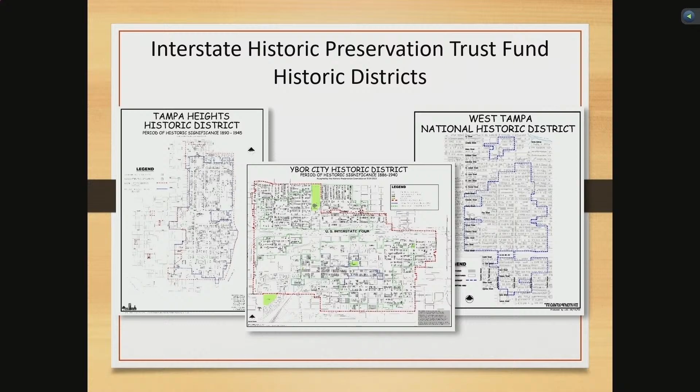They were rehabilitated and sold back into the community, and those excess funds from the sales help fund this program. Its mission is to accelerate the exterior historic preservation of properties in the National Register districts that abut I-4, which is Ybor City, Tampa Heights, and West Tampa. The program has awarded over $700,000 in grants for rehabilitation to houses within those National Register districts. Again, those 3 districts are Tampa Heights, Ybor City, and West Tampa. And those are the national historic districts, which include some of the boundaries of our local districts as well.

To be eligible, a property also has to be at least 75 years old. The proposals must receive a CA and adhere to the Secretary of Interior standards for rehabilitation. The funds cannot be used to acquire properties, and the work cannot have already been initiated or completed.

For the grant program, applicants can apply for a grant between $5,000 and $25,000. The property must be homesteaded and must be their legal residence. They must also not exceed 140% of the median household limits. Eligible activities include structural stabilization, exterior restoration, rehabilitation, or reconstruction of architectural details.

We aim for this to be used as a facade program. We give more weight to those focusing on the front facade of their projects, but we do include things like re-roofs that help keep the structure maintained.

As I mentioned, we have 5 currently being evaluated for the grant program. That evaluation criteria includes the appropriateness of the project as it relates to the Secretary of Interior standards, the projects that alleviate or prevent endangerment of the historic property, the thoroughness of the application, the significance of the structure, and the financial need of the applicant to maintain the improvements to the property.

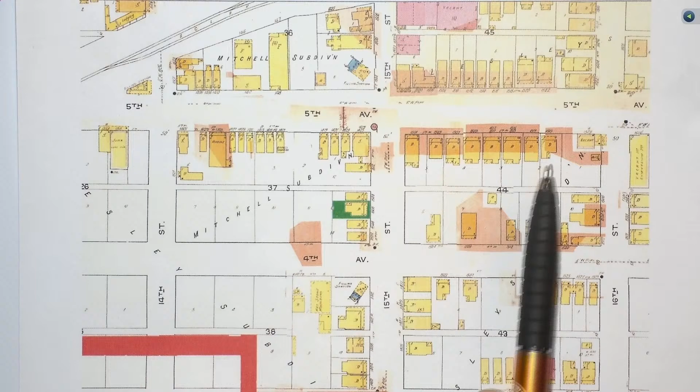You see the vernacular and the fabric within the 1929 Sanborn here. As you continue, you see some single-family row houses and some smaller houses in the immediate vicinity. Looking at the current overhead, you see how the environment has changed, with some larger footprint buildings and some attached dwelling units here and here.

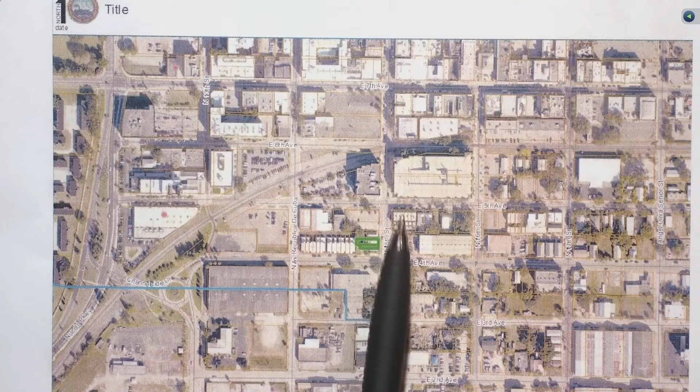Property in question here, once again on 15th Street, between 4th Avenue and 5th Avenue. This is to get you a sense of place within our local district, highlighted in green, within the red highlighted area. The green is the subject site toward the southern boundary.

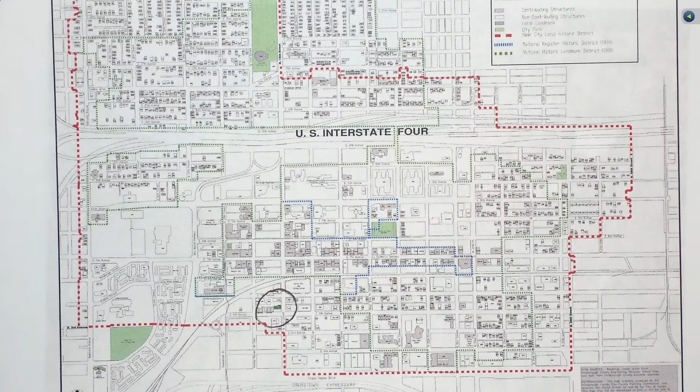This house, that the agent will go through, had fire damage in the back. They were a little bit aggressive moving forward. They started to build the addition to the primary structure without any approval from this board and without permits, so we're here to correct that and get it back on track.

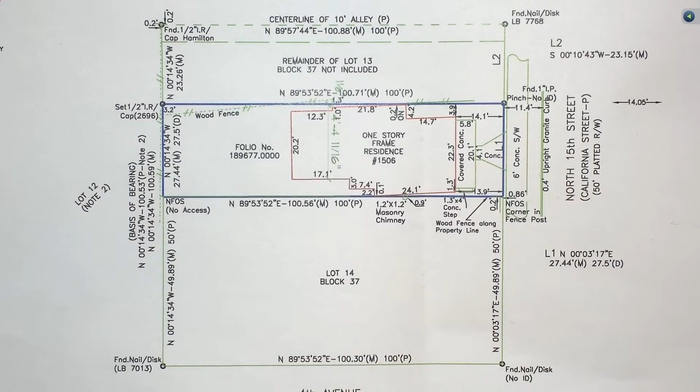And then we are making the new site plan that we already corrected, like Ron said, for the fire department, we had to move 3 feet minimum inside from the property line. So it's on this side that we moved it. We are building the deck in the back, and we'll go with the elevations if you have any questions for that.

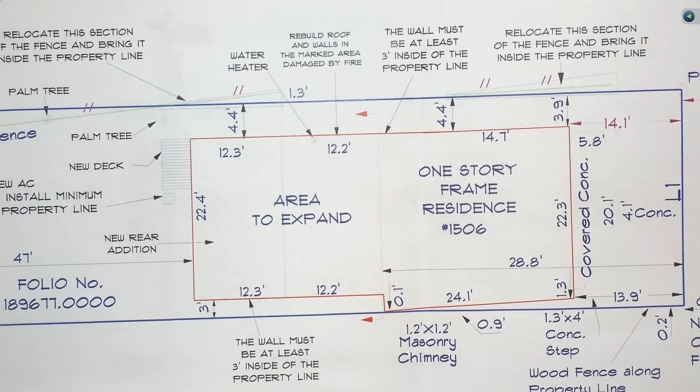No? This is your presentation. Oh, all right, so then we got the east elevation, which is not making any changes on the existing one, and the proposal, you can see that's not... look up there, look what you're looking at. So go to the east elevation again, okay please. All right, so the east elevation doesn't make any changes.

We're going to the west elevation, where you see a pop on the existing one that we remove on the new, because we have to comply with the 3 feet of the property line.

Now, on the south elevation, we can see that the existing one has a flat roof in the back. That's going to be removed because of fire damage, and then we build it as a gable. We continue with the same type of roof and the same type of material, which is metal. All the windows comply with the BLC.

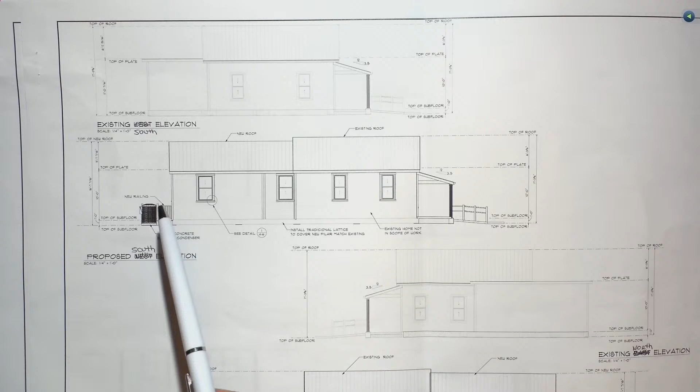And on the north side, you can see it -- the existing one has a flat roof, and then we change it and continue with the same type of roof as the rest of the property.

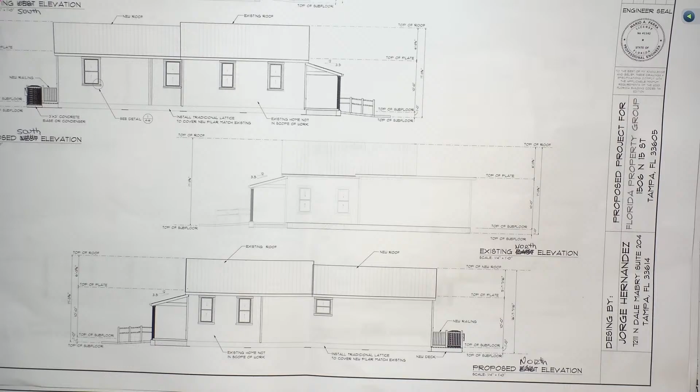This is the existing colors that we're going to continue to maintain, the same colors of the property and the same color for the trim. The trim is going to be the same, and all the material we're using for the siding is going to be the same siding. So we don't change anything on the facade.

Now regarding the parking, this is the site plan for the parking -- we agreed to have 2 parking spaces that are already submitted.

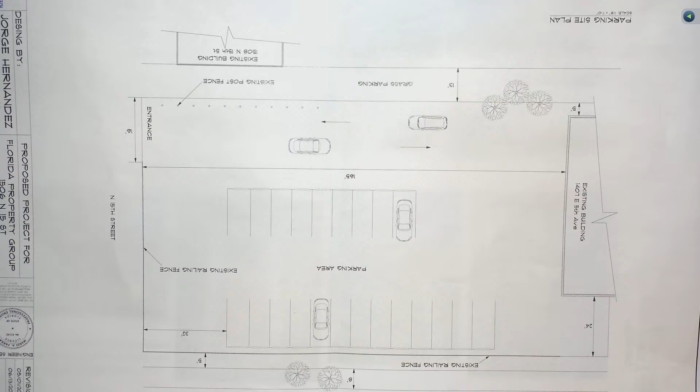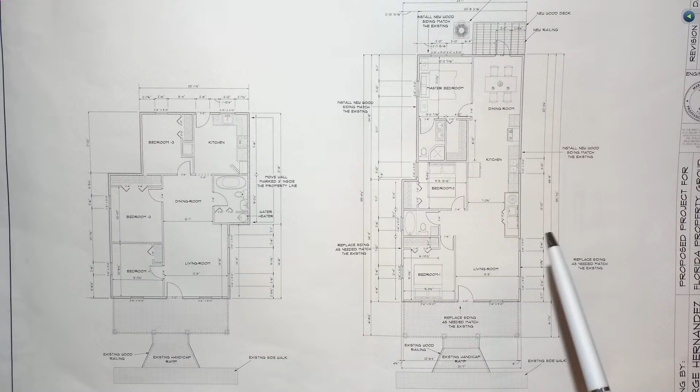Okay, this is the existing floor plan, and that's the new floor plan. This section in here was affected by the fire. That's why the wall had to be removed and completely replaced. So that's why we have to comply with the 3 feet from the property line. That's it, thank you.

Good morning, Commissioners. Ron Vila, I'm a planner with Historic Preservation. Staff finds that the application is consistent with the Ybor City Design Guidelines. In your packet you also have a letter submitted to our office with some information, and the owner who crafted that letter is here if you have any questions.

Moving down to the conditions reflected on pages 3 and 4, I know the agent has a wall section that should be shared with you today, from the top, the ridge, all the way through the foundation. There were some details on the house. The house is a very simple house, so the addition should complement the vernacular of the house. It had a gable vent on it that is reflected in the staff report.

I think additional information is needed on that. The initial request we saw, the introduction of windows were needed on the north elevation to provide additional windows. On the back we were working through different scenarios - at one time they had some sliding doors and a French door. This morning he just showed one man door off the back and then a deck leading from the rear door to grade. So if you want to discuss that as well.

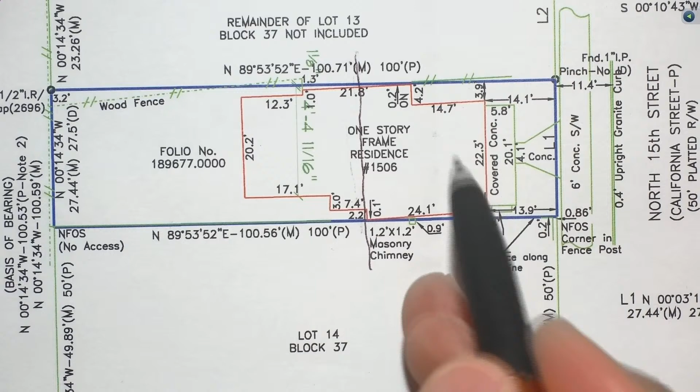Does that projection that goes to the property line, zero lot line, is that 4.2 original? That's original, yes, that goes to the zero lot line. And the line that's 24.1 feet going to the property line, is that the original facade as well? No, this is south, this is the front, the front has 3.9 right now.

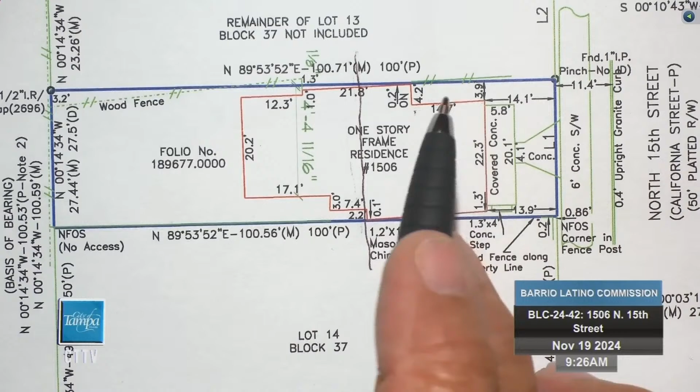But they have a pop on the side for 4.2 that we removed already. You've already removed that? No, we're gonna remove it. They're gonna remove it as soon as they start, that's why I have the new site plan.

Let me ask the question and you answer yes or no. Have you removed the 4.2 foot that goes to the property line already? Not yet. And the 24.1 feet length that goes to the property line, did you remove that portion of the property already? No. Is that historic? Is that the original 1918 portion?

It is. And the 4.2 foot piece, is that part of the original 1918 structure? That's correct. And that line you drew is the original rear of the historic structure, correct? That's correct. Okay, I have a question for staff.

I understand fire codes, I understand building codes, but when it comes to existing buildings, especially in preservation, there are exceptions. Was that reviewed with the applicant and building officials within the city? Staff's understanding is this is part of the historic home, with some additions in the back. This setback line here is going to continue as his plans show, we're not moving it closer to the north property.

No, that's not where I'm going. I'm asking about the 4.2 - if that is an original piece of the primary 1918 structure, and that 24.1 foot at the south which goes to the zero lot line, if that's an original portion of the structure as well. This was part of the original structure that through the fire was removed - this is no longer there. They cannot get credit for any of it. That's an important piece of the puzzle here.

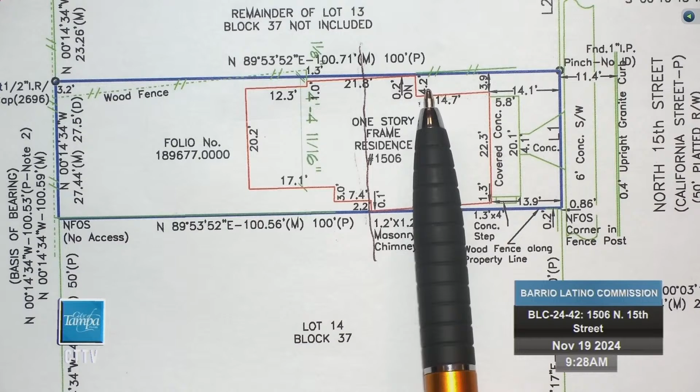So the 4.2 extension that goes to the property line at the north here - that little rectangle at the northwest corner of the original square - that is not original. That was built after the fire? Absolutely, and this, as shown in my pictures, has been built after the fire.

Okay, then let's go to the south elevation. How much of that is original? This is all original. As the property owner to the south came forward, this is an existing condition - we want to leave that, it's vested in. But anything new has to meet fire code.

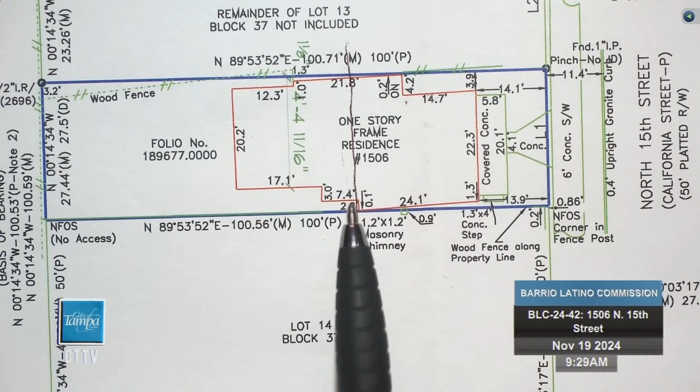Then let me see the proposed plan, please. Even the 2.2, even the 2.2 was existing onto the 2.2. Understood. I want to see your proposed plan, please.

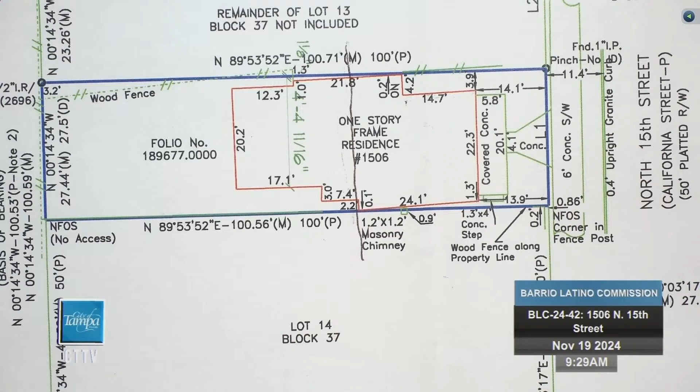So I get the north elevation, I understand. This is the proposed plan.

Does this have the property line on it? I thought there was a plan that had the property line - the site plan? Oh, so you do keep it, all right, I was afraid it was gone. But thank you, that was really important because there was a staff comment about a demolition plan.

And do you have a demolition plan with you today? Yes.

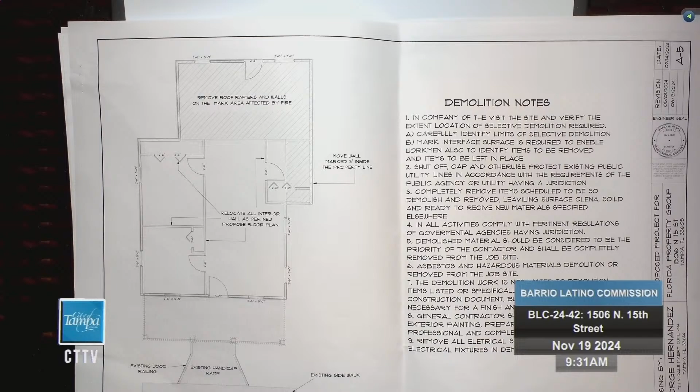Okay, I have no other questions at this time. I might come back to it. Yeah, no questions at this time. Thank you.

So, on the south property line, go back to the new site plan. So that 0.1 foot is right on the property line on the south side.

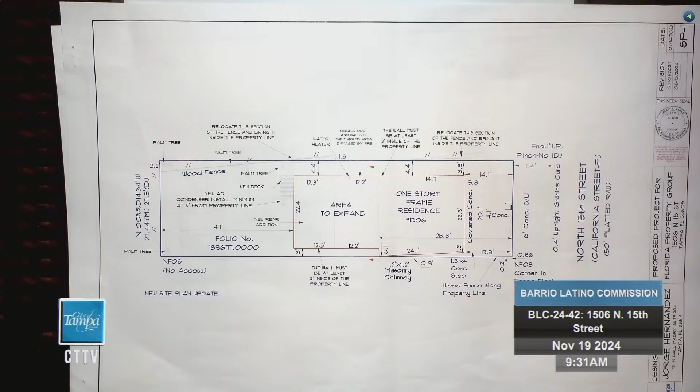And that masonry chimney is over the property line? No, the chimney is not on the property. It's on the property line. So the chimney is wholly on your property? It's on the property line, yes. Are you seeking to maintain the chimney?

Yes. I didn't see that chimney on any of your elevations. We don't have that drawn on the elevations. It should be in the south elevation, but we don't have it drawn in. Is it masonry, a brick chimney? It's a brick chimney, yeah.

Brick chimney, so you're seeking to maintain that? Yeah, we're going to keep it like that, we're not going to touch it. We're not going to touch the chimney, okay, but it's entirely on your property line?

Yes. Okay. Are there any special considerations, since you're leaving that corner where it says the 0.1 foot, that's close to the property line? I'm not sure exactly how, if it's on it or very close. What additional considerations are you going to make on that existing-to-remain section of the historic home to protect that wall or reinforce it to meet building code?

Well, we don't need to touch those walls, they're in very good condition. There is no damage from the fire, only damage on the back area, so we're not going to touch that section. We're only going to paint, maintain, and seal the walls, and that's it.

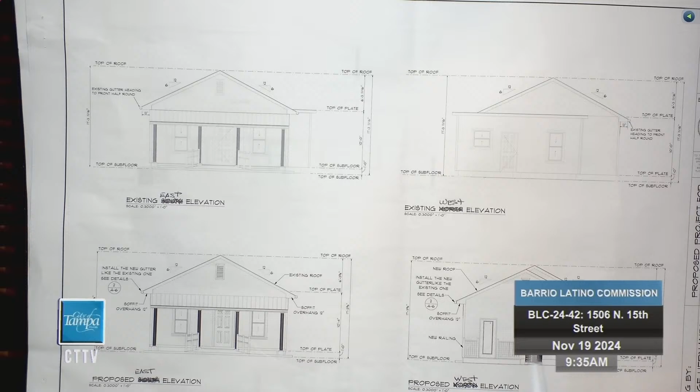Okay, on the west elevation, we change from the flat roof, we're going to continue with the gable, and we're going to use a French door, removing the sliding door because it's not approved. Also, the mechanical AC condenser is right next to the deck, a small deck at the back of the property. And then the windows are compliant with the BLC. That's all we changed. Okay, what's the material of the windows?

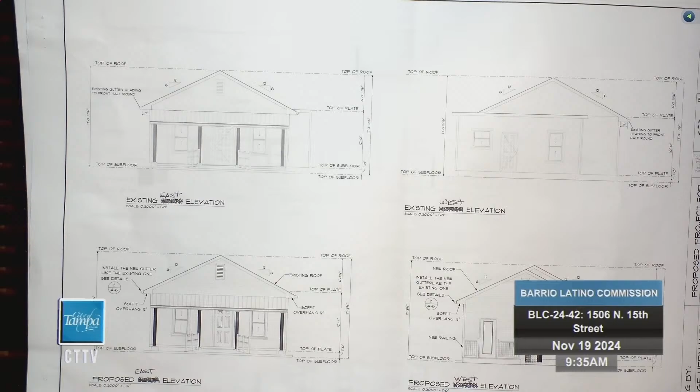Say again? You have the cut sheet? Oh yeah, the sheet for the window. This is Jeld-Wen windows. So they're wood, all wood, yes.

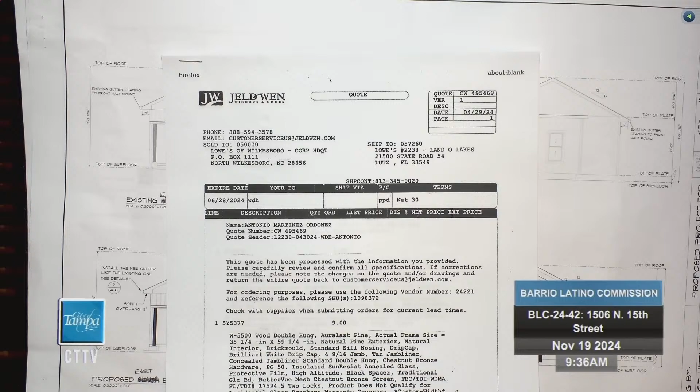There we go, okay. All right, let's talk about our roof. The roof is going to be a metal roof, continuing with the 5-rib roof profile from the old property, so we maintain the same roof. What kind of metal roof? Corrugated roof, 5V crimp to match existing. Galvalume, natural finish? That's correct.

Okay, let's go back to your elevations.

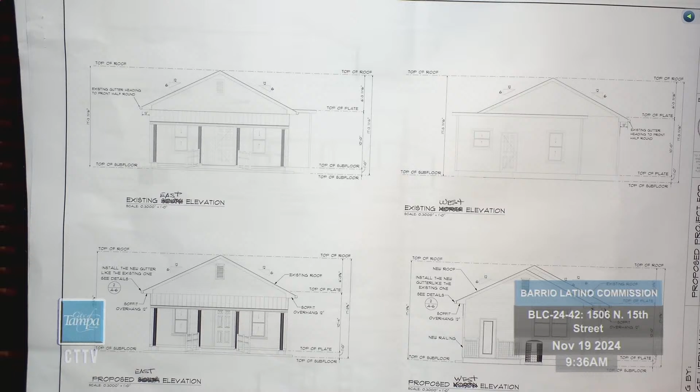All right, what is your siding there? It's a wood siding, 6 inches of wood siding, and we're gonna match it with the existing one, so it's gonna match the same profile. Yes, it's in the notes.

All right, and on your soffit overhangs, how are you gonna treat those? What's the treatment on the existing house? Is it exposed rafter tails? It's a rafter tail, 12 inches on the overhang, and we're gonna continue with the same style, exposed on the addition as well, exposed on the additional wall. And you're gonna have a gutter? We have a gutter, yes, and the gutter is already drawn on the plans.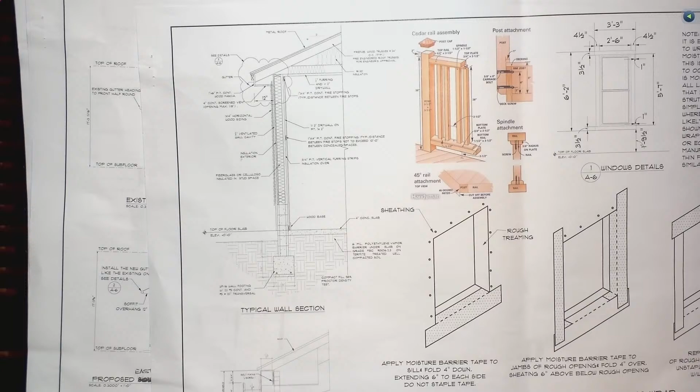Okay, so let's stay on the overhangs and the fascia. Are you using soffit panels and wood fascia boards, or are those exposed rafters? Those rafters are exposed. Well, you're showing fascia panels, and this soffit is panels, because of the front of the property. What happened with this property, the front hasn't exposed a piece of the overhang on the soffit. In the back of the property, when the property turned, they have the vent on it with the wood trim, the old system. So we're gonna continue with the same, so that way nothing comes into the roof, because there's no block. And we need to ventilate it by building code.

Okay, so you are gonna have soffit panels. That's correct, on the wood. All right.

Okay, let's talk about the railing. Is that all wood? Everything is wood, yes, and a wood deck that's raised up and off the ground?

Yes. Okay, when we're talking about our wall section here, is this how you're gonna do this? You're gonna have 4 feet of block coming up, and then you're gonna go to stud construction after that? Yeah, we're gonna go pillars, the same pillars, and we're gonna continue with the same height as the existing property. Okay, so you're gonna have exposed pillars that go down into the addition?

What's the finish on those pillars? It's block, concrete block. Are you painting them? Are you gonna put stucco on them? Well, we can paint it, or stucco, I don't know, the old ones aren't stucco, so we're gonna match the existing ones.

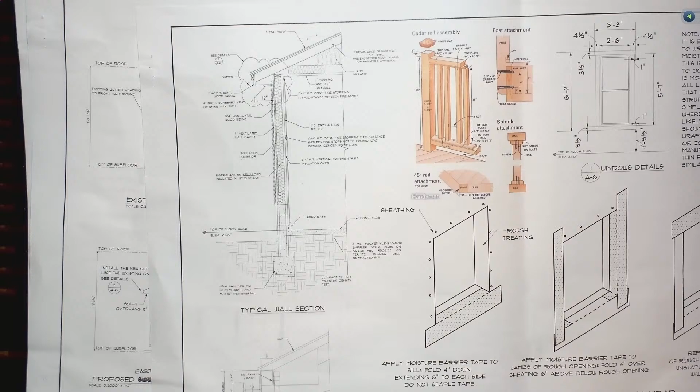Well, continue with historical, okay, and what's gonna go in between the pillars? Nothing between the pillars, it's gonna be open to the outside? It's open, well, we're gonna put a screen like we saw on the elevations. You see on the elevations that we have a screen on the back.

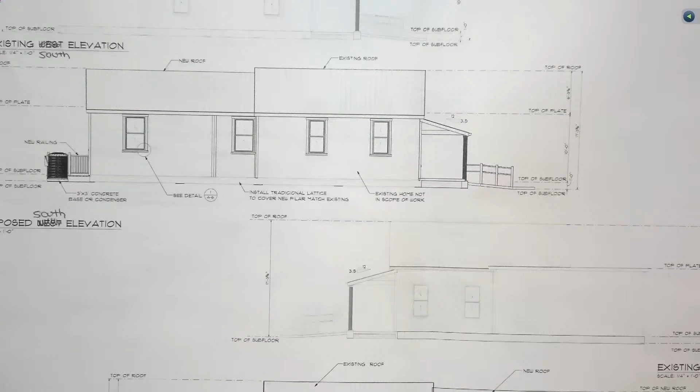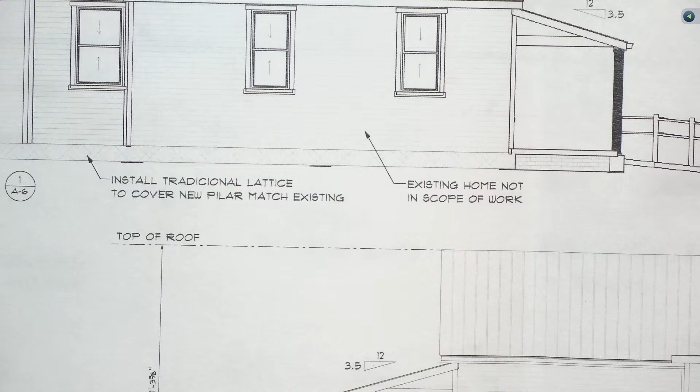Okay, yeah, could you zoom out a little bit here? Can you zoom out a little bit so we can talk about these elevations? Out, out, the other way, there you go. A little bit more, don't be shy.

Okay, all right, so if we're starting here on our corrected south elevation, your existing porch, your existing 5V crimp roof, the existing soffit panels, that corner next to that third window from the right, that's the one that's right on the property line, correct? That's correct. Then it goes back in, and you have another window. Is that window existing or new? Existing. Okay, that's gonna be extremely difficult to trim properly.

And what's the 3 lines right to the left of that window? Does that jog again, or is that straight? Well, that's what they changed on the property when they extended it. When they extended the property, there's a line and there's a trim.

Okay, are we following it? Can you draw the chimney on this elevation? Because I don't think that's right. Something's off, the chimney's definitely missing. And I think that's the historic corner, but then it goes back here, and I don't know if there's another historic jog there or not.

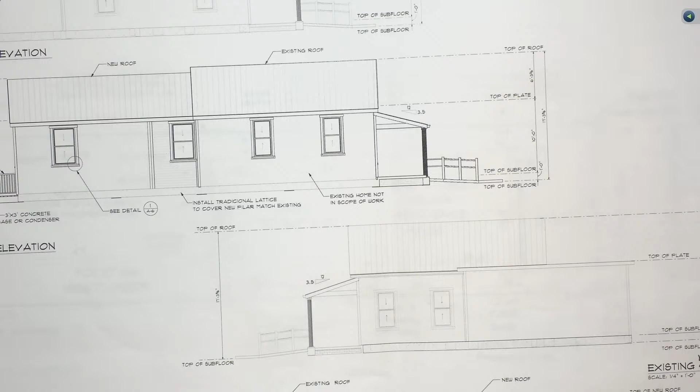Can you show us the proposed floor plan or the proposed site plan? Is there a fence on that side? Yeah. Hold the question, it's such a minimal thing.

I think he's changed the depth of where this wall is relative to providing you closer information. I see that you're asking for both sides of the structure. This is the north side, which will be removed.

That was the addition done without review or approval through the building department. But somebody asked about fencing, and then below, can you pull it up a little bit? Thank you, the bottom one.

Below you have this is the south elevation, this is where the chimney is. This is the front of the house. But the original 1918 building extends beyond that a little bit, beyond the chimney.

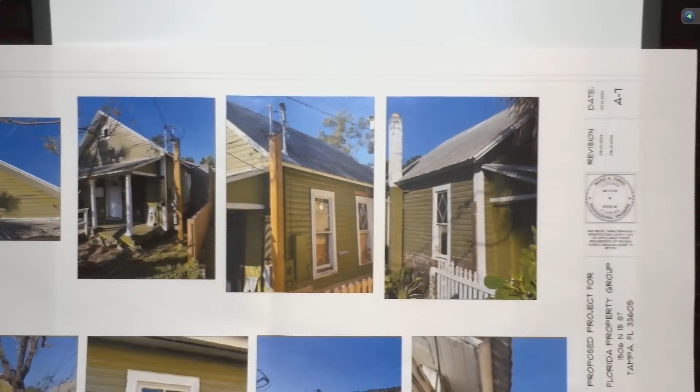How about this - is the existing right here, the chimney, right there? There's a window on the other side of the chimney. Let's go back to our proposed plan. So there is no notch.

No, but he was saying that was historic, and it's not, because look at the difference in the dimension here to there. Yeah, they don't really align. Right, where's the chimney? Can you just draw the chimney, please?

It's kind of like, I know where. Where is the - I have a couple. Sorry, that was really loud.

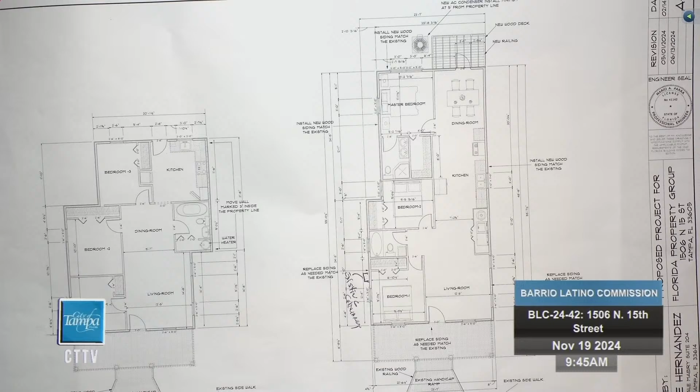So existing chimney to remain, then it goes back and goes back straight. In this corner, by bedroom number 2, is the existing historic corner that's remaining. And then the building jogs back, so on the existing plan, bedroom number 3 should have a window there, but it doesn't.

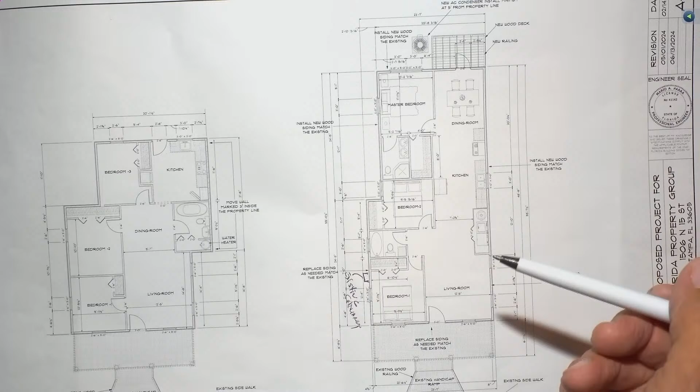Or is a new window in bedroom 2 on the proposed plan new? On the master bedroom? No. All right, let's go on the plan on the left, bedroom number 3. There's no window in there, right? That's correct. But then you go to bedroom 2, which is the same location of where that jog is?

Or is that a new wall? Is that a new wall? Bedroom number 3, this was damaged by the fire, so it had to be a new wall. Okay, that's part of the issue.

Oh, okay, so this jogs back, I don't know, let's say 6 feet or whatever, but then they're building out this wall over here, which is only 2 foot, 2 foot 10, 3 and 13/16 back from that historic existing corner.

So that bedroom 2, that is gonna be a new window. That's correct, that's gonna be a new window, yes. Okay, well now what you just told us a few moments ago about that - the existing, all the windows on the property had to be changed, all the windows.

We already ordered new windows and it's approved by the BLC. We already submitted for approval and it's approved. Are you saying that you're replacing all the existing windows? That's not what you said earlier when you were asked a question. No, we're gonna use the same type of windows, it's wood windows and it's approved.

It's approved by whom? Yeah, we sent it to be approved. That's what you're here for today, so it hasn't been approved yet previously. You get the email.

You may have a window that's been approved by this commission on previous occasions and could be standard for the district, but this project and your windows haven't been approved.

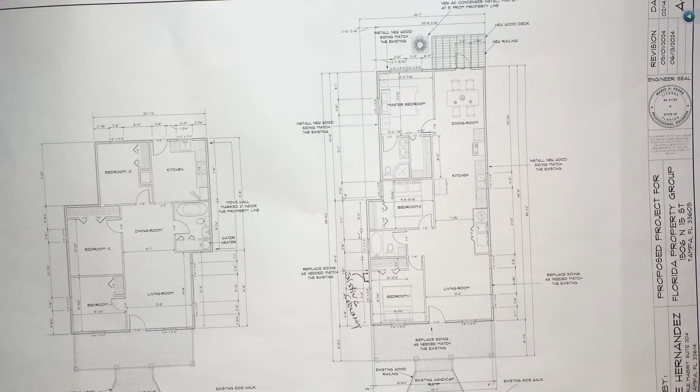Okay, and your rear door is now a hinge door. Okay, I'm gonna pass the baton, I'm exhausted, so who wants to take over?

I have a couple of questions. On the photographs, the windows show a very unique muntin pattern. And that is apparently what you're saying - that unique muntin pattern is not going to be replicated in the new windows. Is there a reason you would not refinish those historic windows and keep them in the historic part of the building?

Juan Vila, staff for Historic Preservation. I've been here long enough that we did many renovations to this structure. Those aren't the original windows to this house. About 15 years ago they introduced some windows. This area was very underkept, if you will - it was blighted at the time, and they had aluminum windows. We worked with a prior owner to bring in period-appropriate materials for the windows, but those came in at a later date, so they are not part of the earlier 1900 fabric.

Okay, all right. And the second question involves this chimney. We have no dimension on this drawing as to the size of the chimney as it extends out from the face of the house. But you're also not showing any - what does the chimney do? Is there a fireplace inside the house?

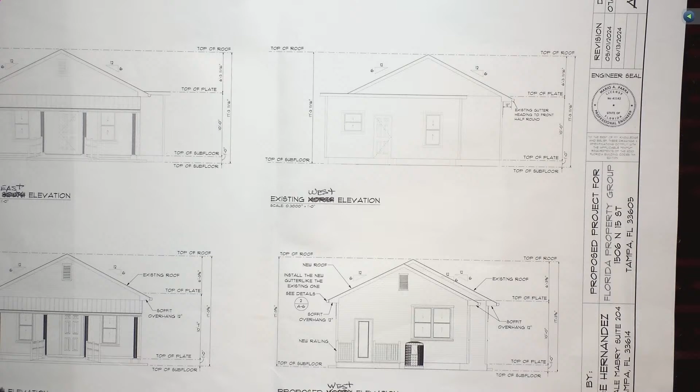Can you pull that up, please, so we can see the north? No, not zoom, just pull the sheet up. That's good, just leave it.

So what is at the rear of the addition at the deck? There's no window there. What's the reasoning for that? The north facade, the new end, closest to your new deck. That whole wall is blank. That's correct. Why? Because it's gonna be the kitchen.

And kitchens don't deserve windows? No, they don't have to have it by building code. I know that, but can we see your floor plan really quickly for that area, for the first floor, the proposed?

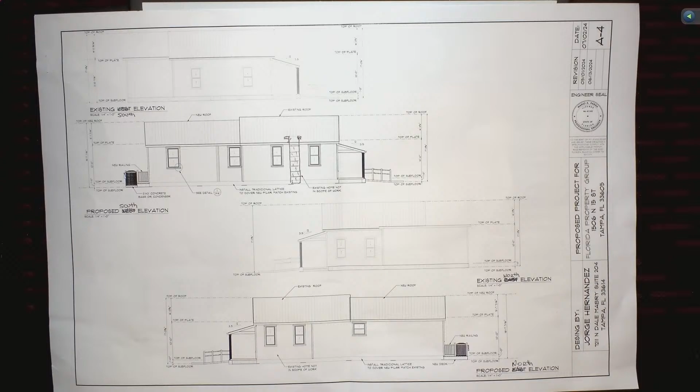And you can just put that on top of the elevation, lay it on top. Can you rotate it 90 degrees, the plan? That's not the kitchen, that's the dining area. This dining area, this is the kitchen right here. So would the kitchen even have one window over the sink?

Okay, that's beautiful, but I am wondering if you looked at the opportunity to add a window or two. Oh yeah, that is not a problem. Okay, we can add it. Okay.

And then there was a remark here about using French doors instead of sliders. Are you using sliders at the rear? No, you're using a French door now. Okay, yeah, okay.

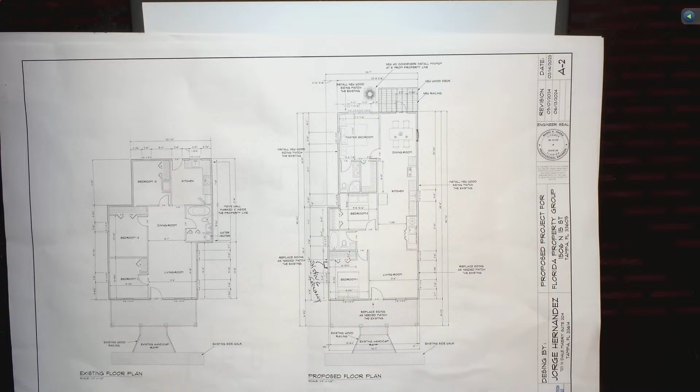And it looked like that door was glass? It's glass, a single glass, yeah. At the rear, on the deck? On the rear. And the front one is an elevation of that? If that was just in the elevation, do you have a spec sheet for that? For the rear door, not yet. Not yet, okay.

And then the AC, we see it's at the rear. The parking solution, you mentioned that you have an agreement. Have you brought that agreement with you so that it can be entered into the record for staff and legal?

Could we just ask him to be sure to provide that? Yes, we will. Sir, we'll just make sure that be provided to staff today or in a reasonable amount of time. In the interim, can you point out on a site map where the actual lot is? Because you showed a plan, but I have no idea how close that is to the house.

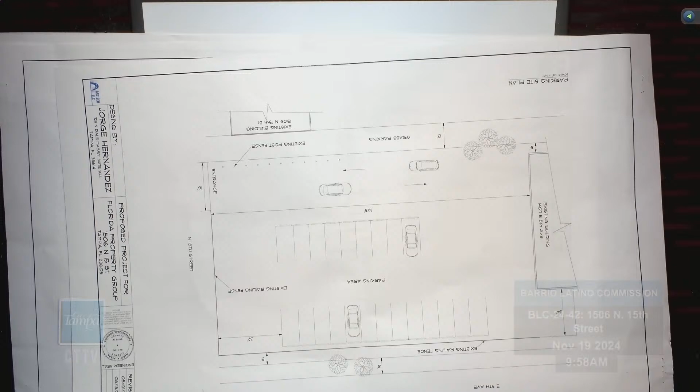It's supposed to be within 1,000 feet, correct, by code? For the lot where you're gonna have the parking lot, yes, I showed on the site plan for the parking lot. It's 2 lots to the north. He needs to be able to answer the question, and I asked, where is it in relationship to the existing structure? Where's the existing structure? I have no idea how close this is.

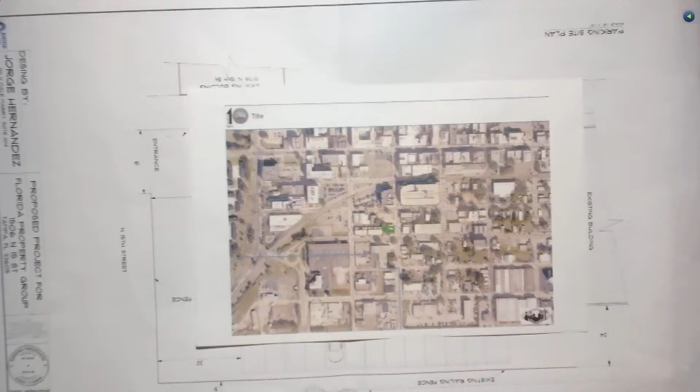Juan Vila, Historic Preservation, if I could assist, sir. This is the vicinity map that I put into the record initially. Property in question that we're talking about is in the green. The lot is right here. Perfect, thank you. Yes, ma'am, 150 feet.

Parking lot, man. He has to come back. I think we'll have to-

I have no other questions at this time. I have a couple more.

Could you go back to the side elevations, the north and the south? We have a staff comment on here to incorporate vertical trim board at the break between historic and new.

Okay, can you zoom out a little bit, please? The whole sheet. Right, right, the whole sheet. We're gonna look at all the elevations right now, please. Okay. There we go, okay, good, perfect, thank you.

All right, so on the south elevations, again, those 3 lines to the left of the third window from the right, that shouldn't be there. Because there's the new addition where that third window from the right starts is a new window and a new wall. So there's no break that needs to occur there. Okay, so we're gonna get rid of that.

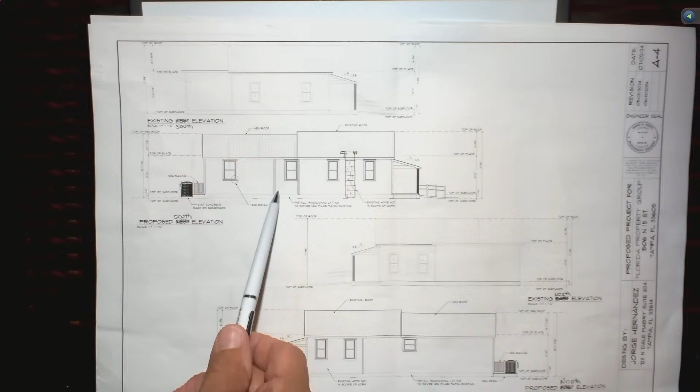Here. What does that indicate? That's indicating that there is the new section from here onto the back, the new construction. Yeah, I don't think that's accurate. Okay, so that whole wall from that third window is brand new. Correct, so you don't need that trim separation. No, I don't need it. Okay, let's cross that out. Yeah.

Okay, now let's go down to the bottom elevation on the north. You have your existing roof, then you're showing two lines to the right of the two windows. We're gonna need that closer down the line, right in there, so that delineates between existing and new accurately for both elevations. Do you agree with that? Okay, all right, that takes care of that staff comment.

Okay, talked about parking detail. I don't have any more questions at this point in time. Anybody else? Susan, you good? I'm good, thank you.

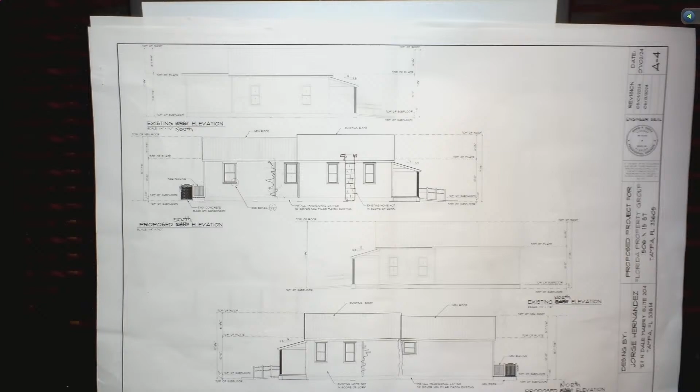We're gonna go ahead and, we're done asking questions. You have a few moments if you'd like to summarize any of the items that we discussed or rebut anything that we discussed, and then we're gonna go ahead and close the public hearing and discuss the case. Okay, thank you. I don't have no question. Okay, so, all right, we're gonna go ahead and close the public hearing since there is no rebuttal, and then we can have discussion on the case, starting with Mr. Chase.

Yeah, I have no comments at this time. I have no comments at this time. I don't either.

I only can remark that the inaccuracies of the drawings have made it extremely difficult for the commission to actually understand the direction and the purpose of what you're doing. And I would caution you in the future that you really take heed to the comments that have been made up here, so that when you have an occasion to present another set of plans to this commission, that they represent more accurately what you are intending.

Okay, maybe that can be a condition, to bring a fresh set of plans that accurately describe everything. Well, seriously, these plans can't be submitted with scribbles on them to the building department, so they will have to be revised, and I think maybe we should ask for them to be reviewed by staff.

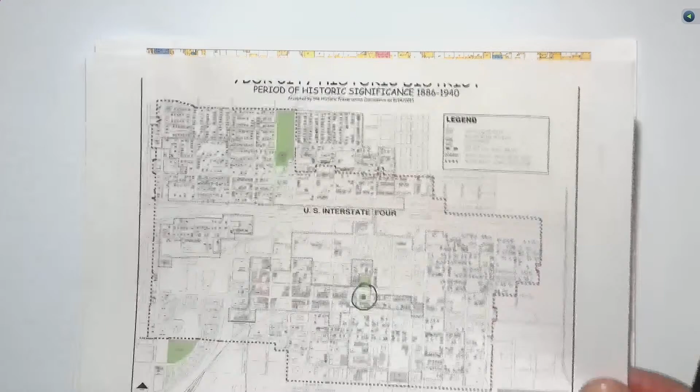We're going to be looking at this property here. This is our vicinity map to show the concentration along 7th Avenue and the contributing structures there. This is on the north side of 7th Avenue, between 18th Street and 19th Street.

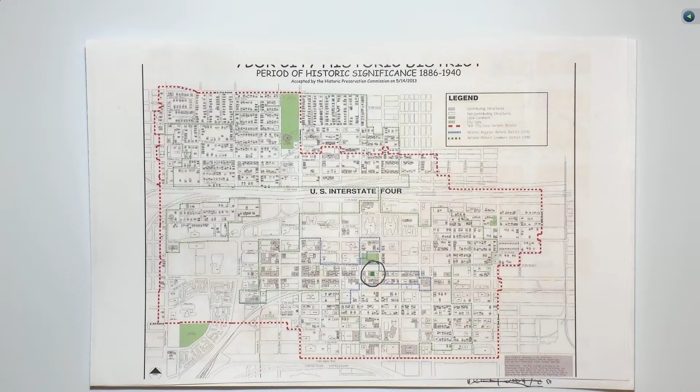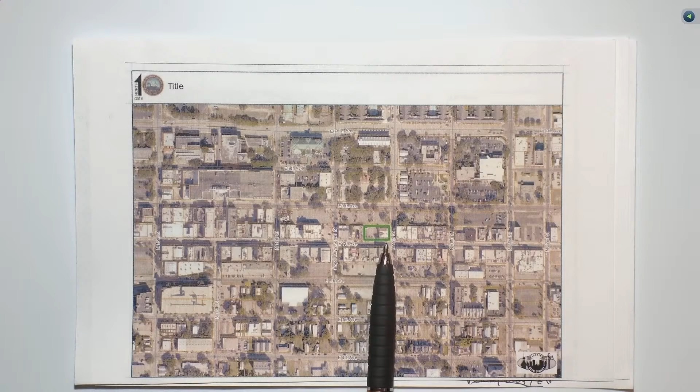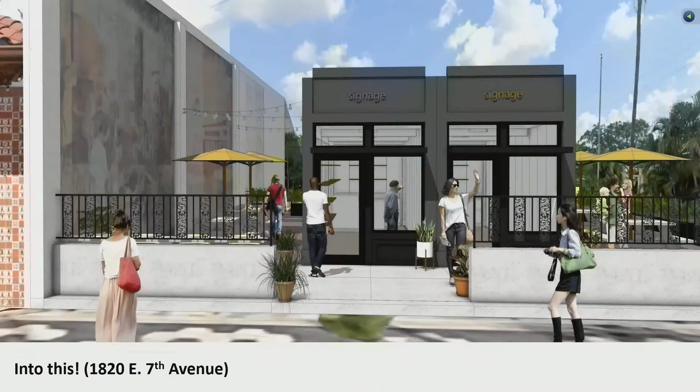So what we're asking today is for approval to turn a part of this sea of asphalt on 7th Avenue into this. We all know that Ybor really needs more retail—I think we'll all kind of agree with that. So that's where I'll leave it. Let David take it over.

We talked about this at the last hearing, but this is something that Stephanie and I are very passionate about—that, as Mr. Vila pointed out, on the Sanborn maps there used to be this concentration of retail along 7th Avenue. From things that happened before we were all around or in charge, basically those teeth were knocked out. So we're trying to come up with techniques to fill things up at an interim level. Obviously what we're trying to do is reconnect the pedestrian flow.

Stephanie and I live in Ybor City. We eat at these restaurants, we go to these bars, and whenever you encounter one of these pockets that's hundreds of feet long of asphalt, it diminishes not only the pedestrian experience, but also Ybor City's vibrancy.

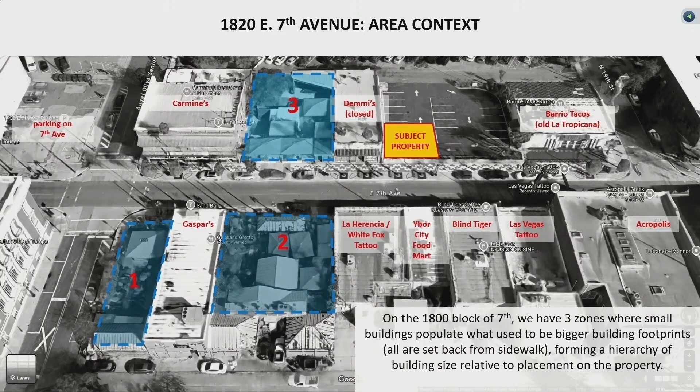Just to go through the area context, the subject property is clearly depicted, and around it we have 3 different zones which are vacant, empty lots that had small structures added to them subsequently. You've got the corner of 18th and 7th next to Gaspar's—actually, both sides of Gaspar's have small structures. And as Mr. Villa pointed out in his presentation, Carmine's, depicted as number 3, has a myriad of small structures that have kind of unfolded over time. Won't spend a ton of time on this, but wanted to give context of small structures on the same block.

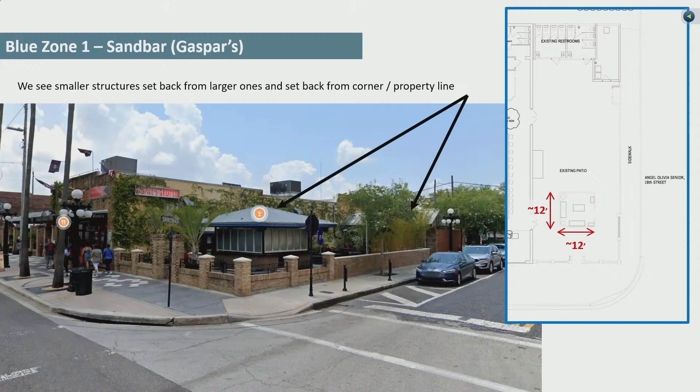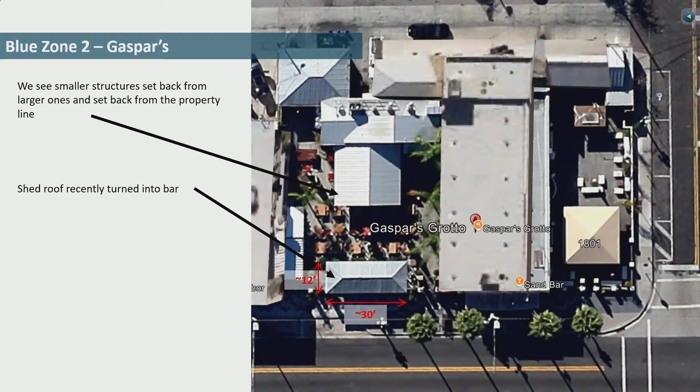So that's Sandbar, which is approximately a 12 by 12 structure. On the other side, on the east side of Gaspar's, you've got again a variety of different small structures. The Carmine's space is actually really interesting because it's unfolded into small structures, different gates, a bunch of different iterations of itself.

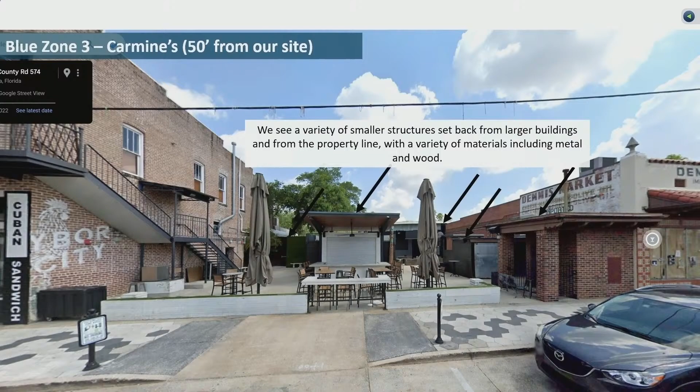Just to stop for a moment, essentially what we've done is we've taken our previous application showing one shop and we've just doubled that. So now we're showing two shops on the site, knowing that our intention in the future is to build out the entire frontage of 7th Avenue, but we're just not there yet. So this is a step. Towards the end of the presentation, because the commission in the last hearing did ask for the equivalent of a master plan or overall scheme that we have in mind, we do have that.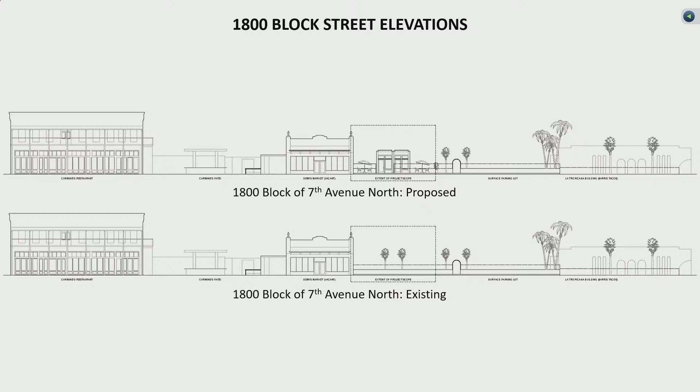And then this slide really just shows that we really designed this shop to live in Ybor. So we took into account the height of the knee walls, the tops of the glass, the height of the doors and canopies to make sure that even though the shops are small, they feel like they belong. And when you're walking down the street at a pedestrian scale, it feels appropriate.

Building materials wise, on the front facade, it is mostly powder coated storefront and Miratec trim, which is a wood composite trim. That's the basis of what we're looking at there.

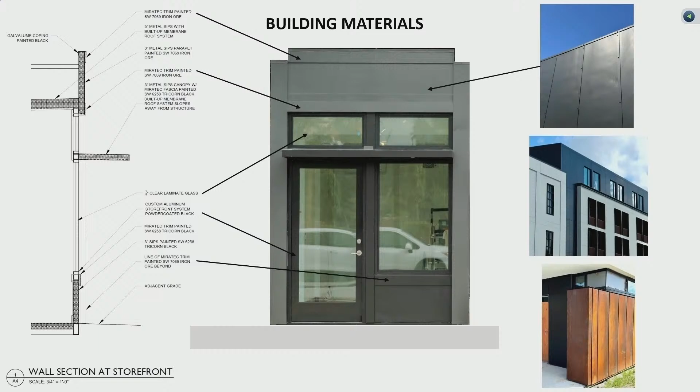Along the sides and a little bit on the front, there is painted metal SIPS panels, which we brought a piece of today so we can pass it around for you guys if you'd like. That covers the sides and the back of the structure.

We wanted to include in our presentation some of the letters we received from folks, because as Stephanie mentioned, we did a pop-up last year, and as a result we had a pretty fantastic outpouring of interest, not only from people in the neighborhood but also people excited about this tenant opportunity to go into a market like Ybor City, which usually has a high threshold, needing to take 3,000 square feet if you're going to be on 7th.

This is a whole new world, so we have some friends who showed up today, Jamal and Lauren, who have a matcha business and are really excited about this opportunity.

We have letters here from one of the ladies who helped us with the pop-up, Christina Weaver, who is focused on women makers and how you can curate a shop. Again, we're talking about a 200 square foot shop, but to have that much activity coming from 200 square feet is our goal.

We also bumped into, showing how beautiful Ybor City is, Allison with Sweet Dog Tampa, who is currently on Platt Street across from Publix. She's really excited about getting a new location in Ybor City. I wanted to impress upon you all that there is real exciting demand to populate these shops, and we feel it will transform Ybor City.

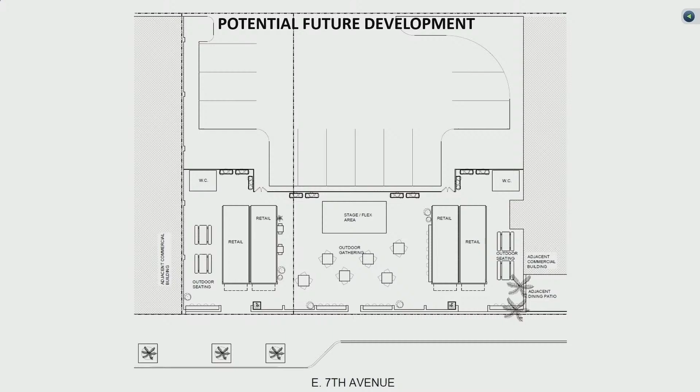The only other thing I wanted to mention, and we know that staff does not support this request, but I do want to put this into the conversation because I think it's important for Jamal and Lauren to understand. We have one shop today, and we could place that within months if approved. The second shop is probably another 12 months because, as Stephanie said, we don't have a ton of money and these things take time. So unfortunately, if we're approved for 2, we'll be waiting probably another year for folks like Jamal and Lauren to move into these spaces.

So what we'd like to put into the conversation, whether now or with staff at a later date, is whether there's something we can do to have a placeholder in place of the shop that's substantial, but maybe not the full shop. Happy to discuss that more if you'd like to hear about it.

Sorry? Okay. No, I'm good. Or, no, I'm good. Okay, I'm good. I thought, okay. I'm good. I think Stephanie just said I confused her, so I'm in bad shape. I'm good. I think that concludes us, right? Yeah, that's it. Okay, that's it.

Okay, is that your presentation? Yes, that is our presentation.

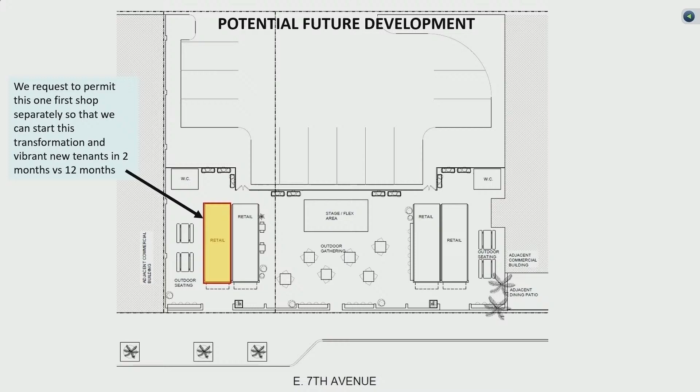We're gonna start with Mr. Chase. Hi, yeah, I have two questions. For the proposed site plan, I saw a path on the sidewalk. Could you get to the proposed site plan? That path kind of looks like... That is the ADA path. They requested that we show that material on the ADA sidewalk, that's just extra material, not anything else.

And then my second question was about the subject property, looking north into the site. That photo in our packet, it looks like 2 palm trees would be removed. Yes. And this might be a question for staff - has there ever been preservation methods of palm trees or trees like that, or do they have to be completely removed for this project?

As this continues through the process, Natural Resources will talk about this. If there's any mitigation, he will have to do it. The palm trees are not historically correct, they're put up for the tourists more than anything else, and you see how the palm trees line 7th Avenue up and down - that was more of a branding of 7th Avenue, but it will be discussed, and the mitigation will be in process.

So that brings me to the landscaping, hardscaping on the list. Can we go back to your site plan, please? The bigger one. So, you have planters around the edges, the north and the east edges. Are there any other pieces of landscape intended for the initial phase, let's call it? I think that the majority of landscaping, like plant material, would be in planters, like container planting, and we don't have that fully fleshed out yet.

So because there's some grade changes happening currently in that parking lot, you've got the curb, and then you've got the asphalt parking surface. We would like to infill a lot of that with pea gravel in the seating area, and then paint the asphalt that we're going to be able to keep, in a fun way that goes with the mural, that goes with the building.

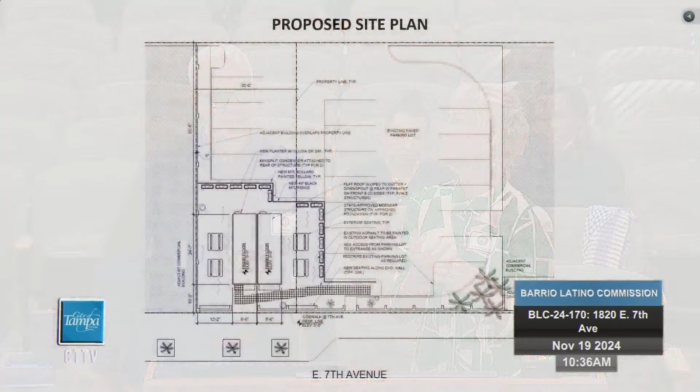So you mentioned the grade changes - is there any issue with the ADA accessibility path that you're showing? No, because we have to cut into the raised curb anyway, because we have to countersink the shop to grade. So we're just gonna have to figure all of that out and make sure that everything is at grade. If you do that, do you see that material being concrete or something more temporary that can still meet ADA compliance? We're exploring a couple different options, it will likely be concrete. The question would be if it's somewhat modular, that we could place it and then remove it at a later date - we're trying to weigh what that cost payoff is.

Understood. So the fence, the perimeter, what is that? Behind the planters, it seems like it's some kind of fencing or railing. It sure is, it's just at the top left there - it's just black metal fencing. I see it in your rendering as well. So it's just basic aluminum or steel black, just something to keep people from wafting in and out from the parking lot.

How tall is that intended? Oh, it says 4 feet, never mind. And then it'll be visually screened by the plants that are in the planters, so if you're sitting there having a beer, you're not looking at the parking lot. Are you gonna have any bollards on the other side to protect it? Yes, bottom left corner, got it, bollard, and then corner of the City of Tampa logo.

The signage, I did see that you had on your palette slide, if you could go to that. Even this slide, we kind of show just a little placeholder signage up above the clerestory windows. I really have to stop.

Whoever's phone is doing that, can someone please turn it off? I don't even know if it's coming from this room. It might be... okay, it's stopped. Very faint. So I'm sorry, the signage on the...

Modular, that's different than the white decal that you had indicated on the palette. Correct, the white vinyl is address numbers, and then we would work with our tenants to develop a signage package that would go through the BLC, some combination of channel letters or something on top of the clerestory windows and/or vinyl in the windows.

Is it closer to Demis or closer to Barrio Taco, to provide electricity to the unit? We don't know yet. As you all well know, TECO kind of comes to its own conclusions. We can kind of steer where we think we want a drop pole to occur, but basically they will drop a pole as discreetly as possible, and then there'll be a whip that comes over to our weatherhead, just like it would be on any other structure. Okay.

We do not anticipate that coming from 7th Avenue. We anticipate it coming from the back? Right, hopefully. Yeah, which there's just a parking lot back there, so I don't know. I'm assuming it's gonna come from the Demi's side.

That was all the questions that I had.

So you guys came to us a couple months ago, and I see that there's some changes. Could you iterate what those changes are? From my memory, the single unit was much closer to Demi's building, it was 4 feet away, or even closer. Now you've got it 12.2 on the side. At the last minute we changed it, but didn't get into that. I'd also like you to comment on the front setbacks, because I think we expressed some concern before that it was too close to the street, and now you've brought it back to 10 feet. If you could kind of go through your thought process on that.

Sure. So as depicted in this drawing, today we are set back 10 feet from the property line from 7th Avenue and a little over 12 feet from the Demi's Market building. Where we started originally, and I'm saying originally because we kind of moved the goalpost on you a little bit, we started off about 2 feet away from Demi's Market building, and then during the presentation I moved it a little bit more. So our final exhibits on the last go-round showed it about 2 feet, and then for the presentation we had moved it maybe to about 12, 7 feet. It was not quite 12 feet. Okay, we were closer, but yeah, somewhere in there.

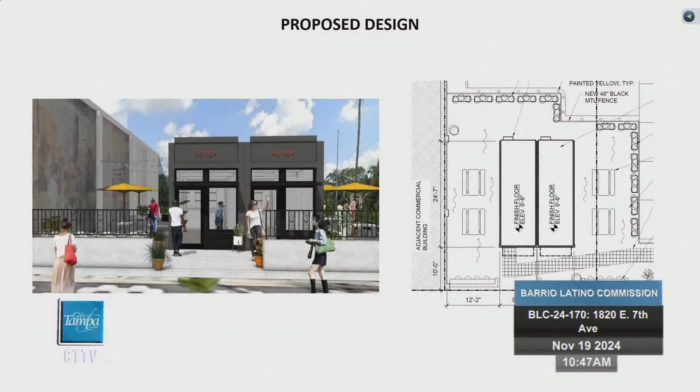If you look at the site plan, you can see that the masonry part of that wall has almost little buttresses that jut back into the parking lot side of things. So we're removing a piece of that from one buttress to the other so that we're keeping the structure intact for that masonry wall.

So that's how we got that to, well, I guess the 12'2" measurement's not exactly correct. And to your point about the buttress thing, we're responding to the coursing as well, because that's a CMU block wall, so we're trying to find the dimension that makes the most sense to cut into. You're gonna cut that wall at a coursing.

The steel kind of relates to that, it's easier to modify, so I think that's gonna be the easier end to modify. To Stephanie's point about the buttressing, there's also struts that come back on the metal fencing that sit on top of those masonry buttresses. So everything is kind of interconnected there, we don't want to cut it back and have the top steel fence be wobbly.

Honestly, we're gonna have to see how that metal behaves once we try to alter it, because it's not in great shape. I think it's such an interesting found object, but because it's not historically significant, if it doesn't behave nicely, you might have to find a way to delicately remove that. But your intent is to keep the existing wall in there, demo a section of it, including the metal, and try to find a nice turn point.

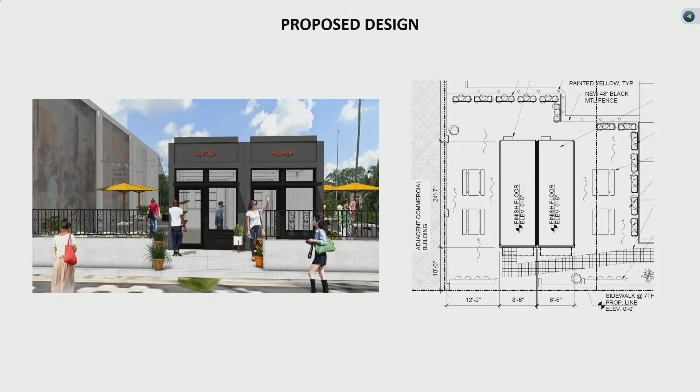We do suspect that at the Tropicana gate side of things, we're gonna have to ramp up from that side, kind of in the middle of the site. I think we may have to ramp that, depending on the elevation. So you'll have ADA covered from the parking lot and 7th Avenue, and that's probably where you modify where the existing gate is. Correct.

And I think we touched upon some of the materials of what that is - I've heard concrete and pea gravel on a modular sense. I think it'd be good to define that sooner. I think that's something you can work with staff on, and I have faith in you to develop a nice solution for that.

So going back to what we're seeing and talking about approving today - we've seen a master plan for the whole front site, which includes 4 units, 2 restrooms, some other site work. We're not reviewing that today. I think what's being proposed is what we see here, the 2 units, but then we also had some discussion of maybe we just do 1 right now and another one at some point in time. So I just want to be clear on what's being proposed and what we're looking at today, because I see 2 units here.

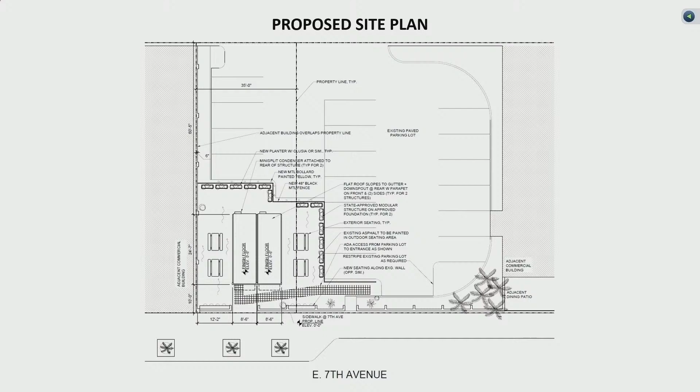I understand where you're coming from - one unit's ready now, you have that one to build. But I think there are certain timelines inherently built into this Barrio approval, and I don't recall the timeline offhand. Maybe Dana or Ron could comment on that. There's some flexibility here depending on that answer, let's see what we can agree on. There's a 5-year timeline when you give an approval, so it can move forward in the time they're talking about. As it goes forward to permitting, if it receives a CO for one of the units...

That was discussed internally with zoning and legal, and it was frowned upon at that time. So the request we talked about with them is we would support the 2 units coming forward, which was a modification of the original request. That timeline should be respected, and legal is here in case she wants to interject anything. So for Barrio purposes, we're going with 2 units on the site, and then at permitting, they can do 1 at a time as need be.

Mr. Vila, can you confirm - assuming we get approved for the 2 units today, and we go in and do the site work and install 1, can we get a CO? Can that 1 unit be occupied without the Barrio's final sign-off, knowing that the second unit is still to come? The internal discussions we've had are that both units have to come forward and be CO'd at the same time. So independently, the phasing being requested this morning will not be supported.

That's a specific Barrio thing, because building department does phase planning all the time. We can get temporary COs for one portion of a project and have the other one done, and you usually have 3 years to finish a permit.

Well, so is that a Barrio thing? Well, the internal discussion we had with zoning supported that the project should come forward in totality, as 2 units. We spoke with legal as well, and they supported that request. So if it's a Barrio thing or not, that's what we're moving forward with today. Zoning, but the building department issues COs.